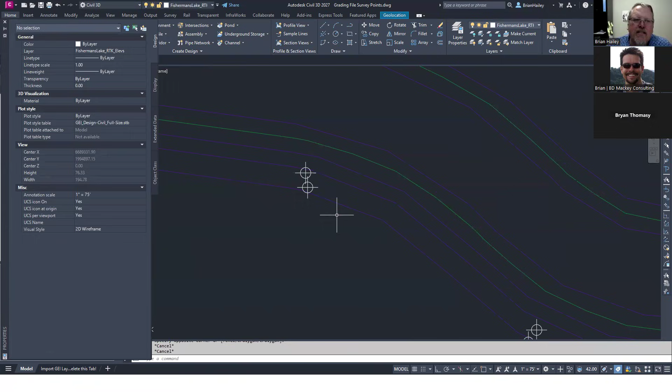Well, that's where the fact that Civil 3D is built on top of Map 3D comes into play. If you weren't aware, Civil 3D has Map 3D built into it, so you have almost all the functionality of Map 3D. I think some of the industry models aren't available in Civil 3D, but pretty much everything in Map 3D is available in Civil 3D. You just have to know where to look for it. So if I come up here to the workspace where it says Civil 3D, I can change this to the Planning and Analysis workspace.

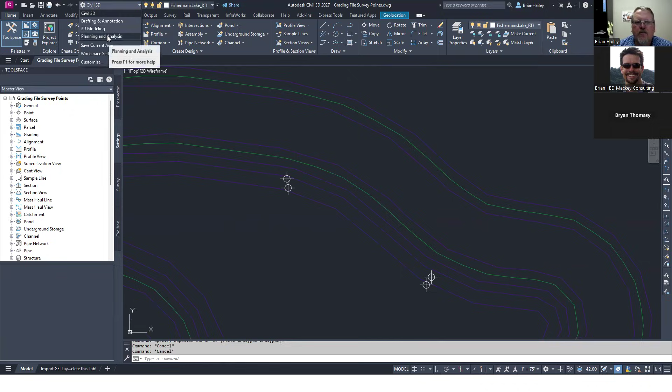All right. And this is where you get access to all of the map tools. Now, map has the ability to place annotation on objects that have this object data. And again, the object data came from a GIS system somewhere, either from importing a shape file or exporting out of another GIS program, something along those lines. And so I'm going to come over here to the Annotate tab.

And what we need to do first is we need to define a template. So the template says, this is how I want it to be labeled. This is how I want the label to look. And this is the data that I want it to label. So I need to define a template. And once the template is defined, I can then insert that template onto the objects inside of the drawing.

So I'm going to go ahead and define the template here. This particular drawing doesn't have any templates. So I'm simply going to create a new template. We'll give it a name. We'll call this one feature ID. Select OK. And it brings up the block editor. And this is where you go through and you create the annotation template. It's just a block that has map annotation text inside of it. You can put other things in there as well, but the key is that map annotation text.

Now, if we were using Map 3D and not Civil 3D, up here on the ribbon, there would be a button to insert map annotation text. But for some reason, the Civil 3D folks thought, Civil 3D users don't need that. We're not going to put it up there. So you have to type it. So the command is MAPANNTEXT. So this allows you to place in that map annotation text. So I'm going to go ahead and do that.

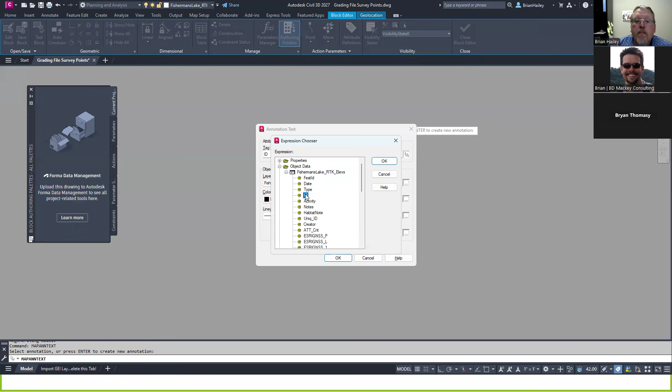So I can pick up on the properties of the object, or I can pick up on the attributes of the block, or things like that. But in this case, I'm interested in this object data, because that's where that feature ID, that ID is. So I'm just going to choose that. Now remember, if you don't see object data, then this really doesn't do you a whole lot of good. I suppose you could label the attributes of a block, but why not just use the attributes of the block? Anyways, I'm going to choose that one, and you can see it places it up here. And then you can put in all this other information.

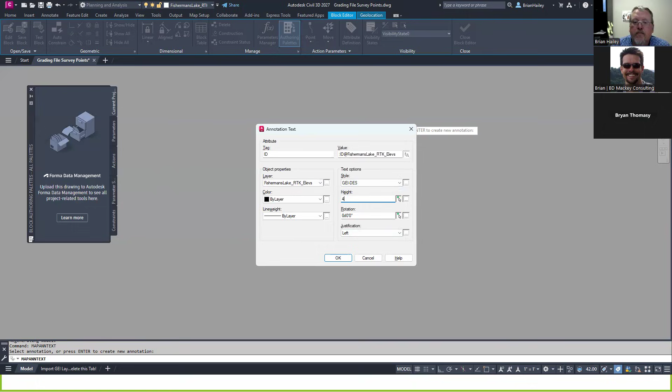Now, as best I can tell, the map annotation stuff does not respond to the drawing scale. So what I'm going to do is just manually set the height here. I want this to be 4 units tall in the drawing. Select OK. And then I'm going to insert this wherever I want it to be within the block editor. So I'm just going to insert it at the insertion point at 0, 0. So I just type 0, 0. For whatever reason, we're zoomed way out. So if I zoom extents, you can see there is the text now.

And if I wanted to, I could add additional text features in here, add them above, below, whatever I want. In this example, I'm just going to do the one, just so you can see how it's done. And if anybody's interested, I can show you how to add the map annotation text button to this ribbon. If anybody's interested, you can put that in the Q&A, say, hey, Brian, how do you add it?

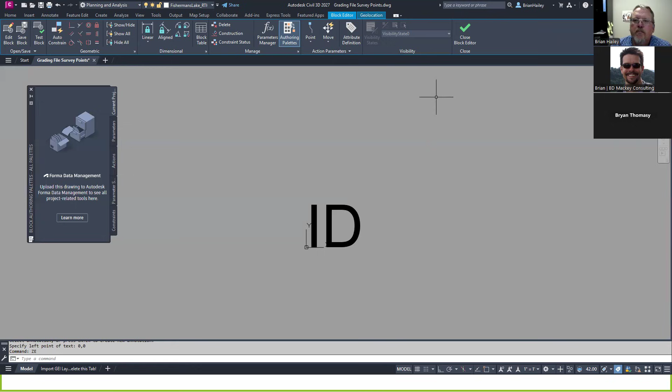You get the idea. All right, so I'm gonna go ahead and close. I'll go ahead and save that. And we're good to go. So I'll go ahead and hit OK here.

So while you're in there, you had a follow-up from Christopher. Can that see property set data too, or just object data? I believe it's just object data. I don't think it can see property set data, because property set data is a Civil 3D thing, and this is a Map 3D tool. But I'm not positive on that.

Right, but that's a great question. Perhaps we can investigate that.

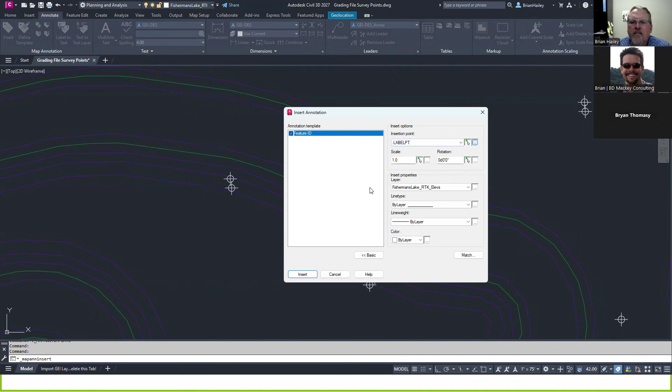So now that I've got the template defined, I can come over here and insert the template. I'll choose insert, choose the template I want to use, and toggle on that feature ID. Then I've got some options here, so I can choose different places that I want to label it. This is important if you're labeling a parcel or something like that, like the centroid. I'm just going to leave it all set to the defaults here. Choose insert, then I can select those objects, hit enter, and it labels them for me.

And there it is. If I need to, I can adjust those around. But I have the text in there based off of the value on that particular AutoCAD point, which is just object data. Now there are some other options up here, and I haven't really played around with these.

I figured I could just go ahead and try it live. Why not? There's an option here to refresh the annotation, so let's see what that is. Let's see if this moves them back to where they were.

So if I choose the feature ID and I choose OK, full annotation, yep, sets them back to where they were.

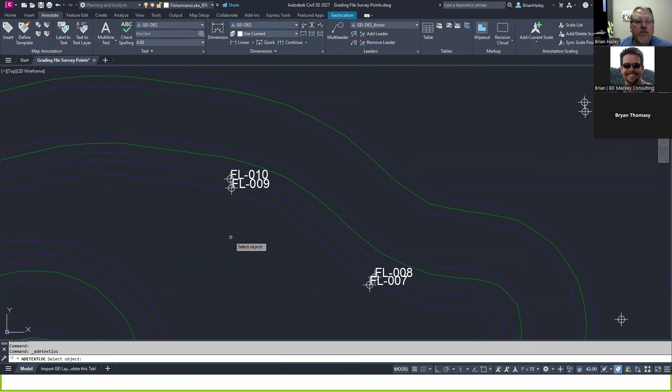There was also one in here where you could reposition it, define the text location. I'm not sure what this one was. Select an object. And I want it to go... not sure what's going on. Pick a new location for the text. There, it doesn't seem to be doing anything.

What if I refresh now? No, doesn't seem to do it. I was hoping it would. What was this one? This one was update annotation. I'm not sure what the refresh versus update is.

And then if you want to, you can delete them all. So if I'm like, oh, I really don't like these, I can just come in here and delete all the labels that were created from that feature ID, and now they're all gone. Now I'm going to undo that real quick. I can also just erase them.

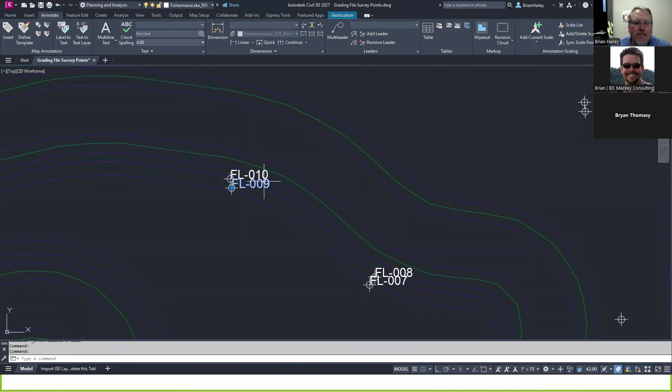And I just found this out earlier. So if I erase them, and then I decide, you know what, I don't like that template, I want to get rid of it, that annotation template, I can come in here to the feature ID and then delete that template. And you'll get a notice that, hey, it can't, because it's being used. What's it being used by? Well, nothing, but it's being used.

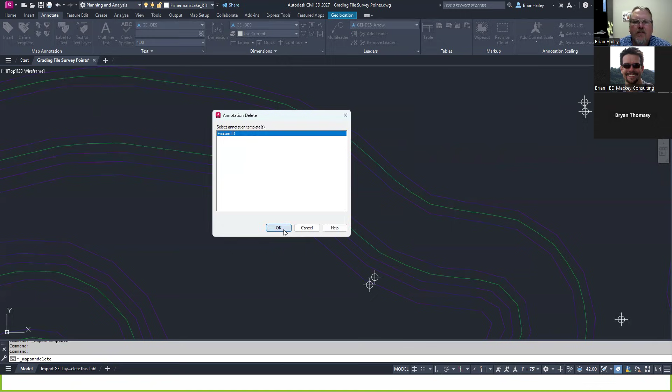So if I come in here and I then delete the annotation, just like I did earlier, now when I go in I can then delete that annotation template if I want to. So like I said, it's just something I kind of noticed - the question came up here in the office and I thought it would be a good thing to share with everybody, because you might find yourself running into that situation.

So now you're showing this in 27. Is it only viable in 27, or is it there? You did have to type in your map anno, whatever that command was. Is it only 27 or is it in previous releases as well? That's a good question, I don't know. I haven't tried it in the previous releases, but I believe you have to type it.

Yeah, I know a lot of the map functions are available in previous releases. Matter of fact, we were just looking for this and we were in 2025 doing the similar thing, but we were actually wanting to use the data to populate our structures with inverts. Because you get a lot of that stuff from the GIS. And that was Max's question.

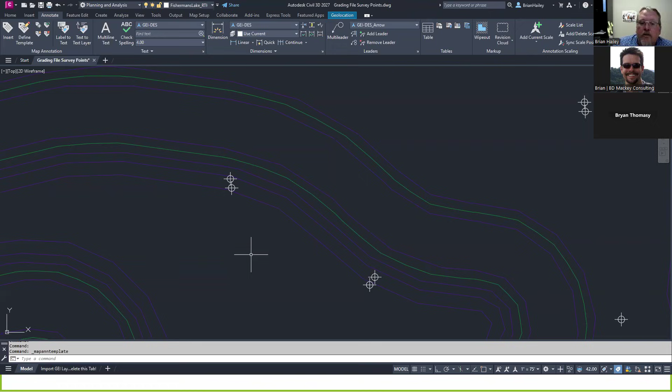So if anyone has 26, 5, or 4 open there, feel free to type in that command and see if it's there for Max. So the commands should be there. So this functionality has been around since like release 14. Right, so I know the command, the tools will work there. It's just whether or not that command is on the ribbon is the question.

And then Adam posted a follow-up to Christopher's property set data question in the chat. Says you can't use the map tools for property set data, but you can use the PSD editor to create some label styles similar to map annotations. It's more difficult since it's not documented. And here's an old tutorial, so for those of you listening live, you can click on that link in the chat.

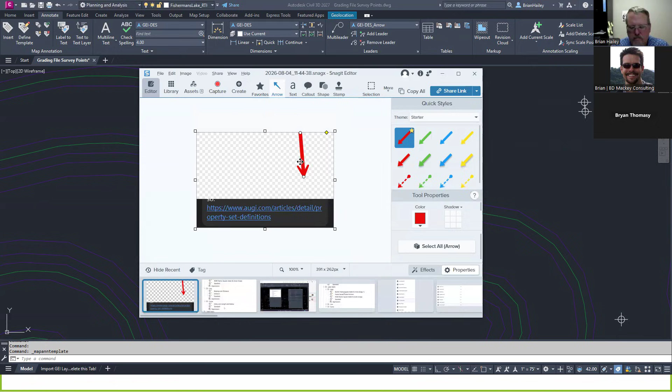So there were some other questions. Max asked, do we work with reference templates? And if so, are there any issues with working with them? They seem to be having an issue with the label styles that we're working around, but I'd like to avoid any other foreseen issues before rolling it out.

I'll be honest, I do not utilize reference templates at all. We actually have a project where we're considering using them for the first time, so there's some caveats to be aware of with them, and I can show that off.

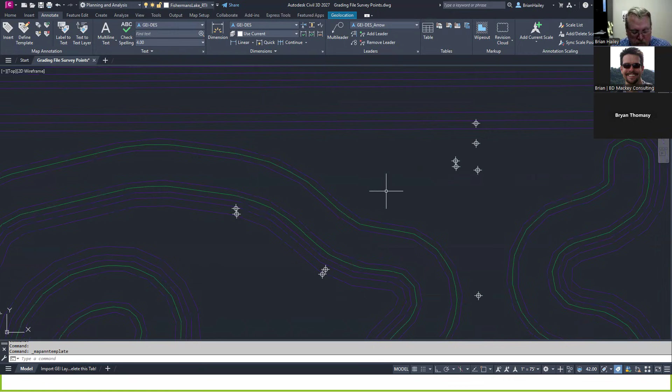Let me go ahead and create a new drawing so we can discuss real quick how these work. I'm going to open up a drawing with no template, so this is like the most basic drawing you can get in AutoCAD for the most part. We'll change this back to the Civil 3D workspace, and we'll go ahead and save this.

Let's just save it here. Reference. Voila. All right, don't show me this again.

Okay, so to bring in a reference template, you would go to the Manage tab up on the ribbon, and then we have under Styles, Reference. So before I do this, I just want everybody to see if I go surface, surface styles, you can see all we have here is standard. So I'm going to go ahead and reference in a template.

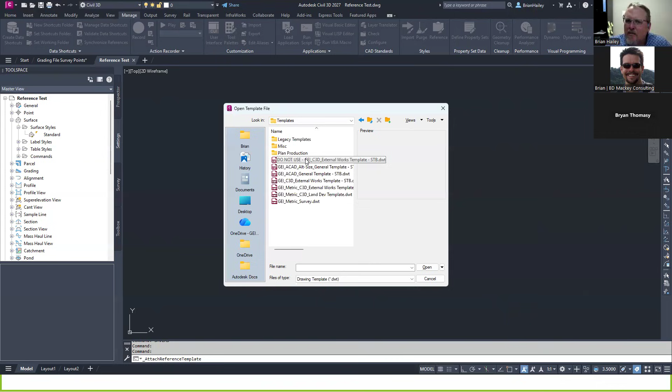Okay, so as you're attaching the reference, you can choose what information you want to reference in. All right, let me go ahead and make this a bit bigger. So for example, maybe from this template, all I'm interested in are the surfaces.

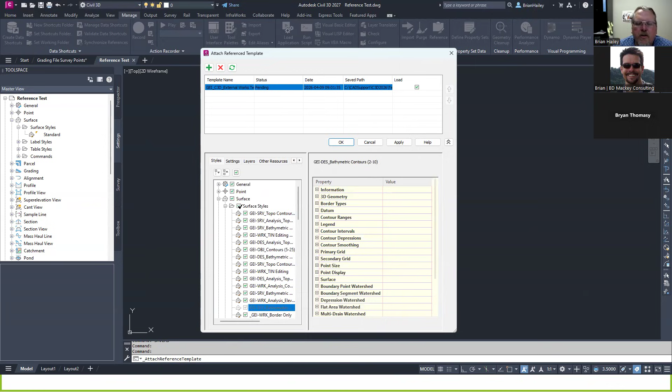So I can uncheck everything. Let me uncheck it. And then apparently... can't uncheck everything. There's probably like the settings are controlling things. Yeah, so for example, this is probably a default style in a setting somewhere, so you probably can't undo it. But you can pick and choose what you want.

You can go to the settings and... is that cough? There it is. You said you've been struggling for a while with this. So this cough will go on for like 5-10 minutes and then it'll disappear. It's bizarre. I apologize, but there's not a whole lot I can do about that.

But anyways, you can choose whether or not you want to bring in the drawing settings, the feature settings. You can bring in the AutoCAD layers as well, so if you change a layer in the template, it will change in this drawing. Other resources: blocks, text styles, line types. What else do we have here? Property sets—we mentioned property sets before.

It's not something I've used a whole lot, property sets, but you can bring those in as well. You can also bring in additional templates, so if you also want to reference in the default Civil 3D template, you can do that as well. I'm not going to do that right here, but I'll just go ahead and select OK.

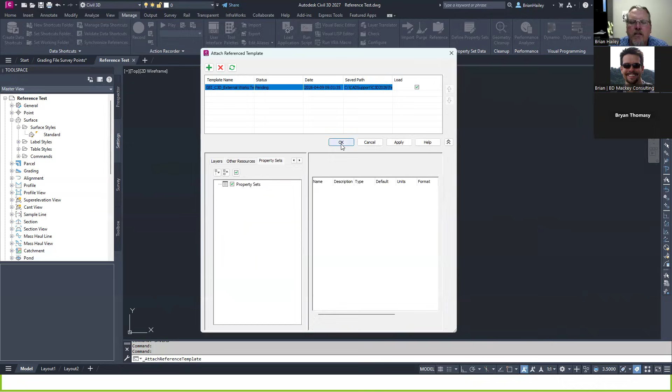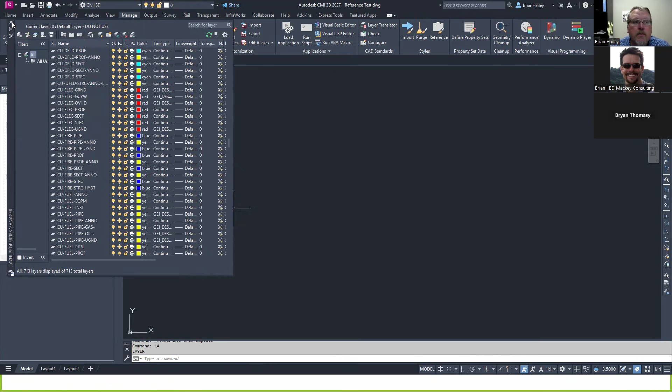And after a moment, you can see we now have all these styles in our drawing. You'll notice a little blue paperclip next to it, which means that particular file is referenced in. If I go into my layers, I have all my layers referenced in too—these aren't just the layers that came from the styles, these are also the layers that came from that template that weren't being used in a style. If I go into my drawing settings, my feature settings, those are all referenced in too.

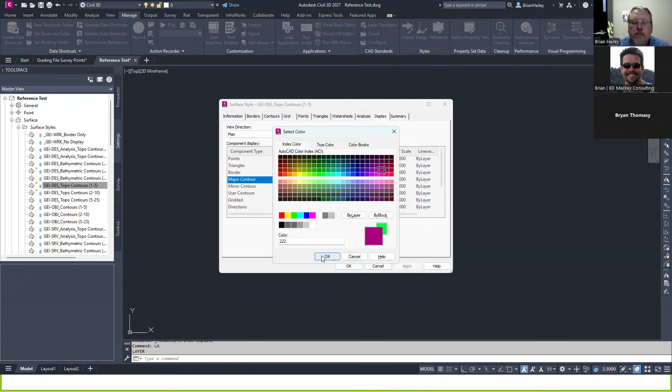If I decide, hey, for this particular drawing I need to change something on, let's do the design contours—I'm just going to edit this. Maybe I want to put the contours on a different layer or force a color on. I'll be a bad drafter and force a color on something here. All right, maybe I want to make these like a dark red or dark purple. You'll be getting an email promptly from HR.

So if I'm trying to edit a reference style, as soon as I hit OK, I get this little dialog box saying, hey, wait a minute. You can't edit this, it's being referenced in. What do you want to do?

So there's three options. One, you can cancel and say, I shouldn't have been doing that, let me cancel out and go back the way it was. The other option is to make a local copy of the style with a different name, and then use that, which is probably what you should do.

The other option is to apply the edits for just this drawing session, so the next time you open the drawing, the style reverts back to the way it was in the template. Notice there's no option to change the style in the template, and no option to just override it always for this drawing. So you can either create a copy or not. Those are really your only options.

I do like this because a lot of times it's like, oh, I just need to see the border of the surface. Go edit the style, turn the border on, and then you don't have to worry about it because it's just going to revert back the way it was before, even though you really should just change the style the surface is using.

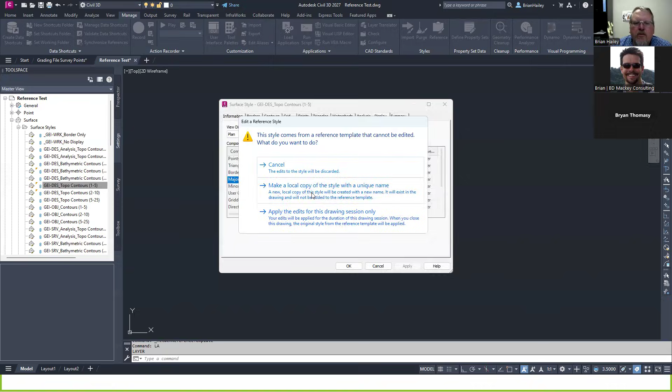So I'll go ahead and make a local copy, and you can see it now has a new style here, and it puts the copy at the end. And it is not referenced in, so you're good to go.

Now, if I decide I don't want to reference this anymore, you can just choose that, remove the reference.

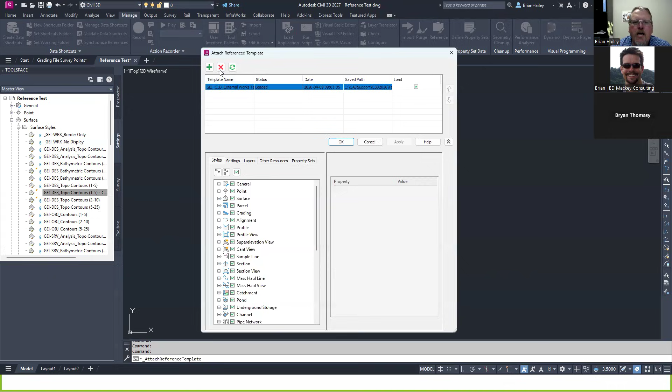And all those styles should eventually go away. Did it not work? Oh, I didn't hit OK. Hit the X. There you go. They all go away. But my copy remains, and any styles that were being used remain.

So that's kind of how a reference template works.

Now I'm really curious if folks have experience with reference templates, and have any thoughts on them. Good, bad, indifferent. Oh, I don't really care about indifference. Christopher and Robert both had comments in the chat on that.

Christopher says he uses reference templates for the sole purpose of managing property set definitions and associated value styles, value lists, and table styles. Oh, okay, excellent.

And then Robert said, be careful, circular reference templates are possible when using a template to start a drawing. Circular reference templates, like if you use the same template that you're referencing in to create the drawing.

I mean, that would be kind of ideal though, right? But the whole objective is to not bring in the kitchen sink. And that's the nicety behind the reference template.

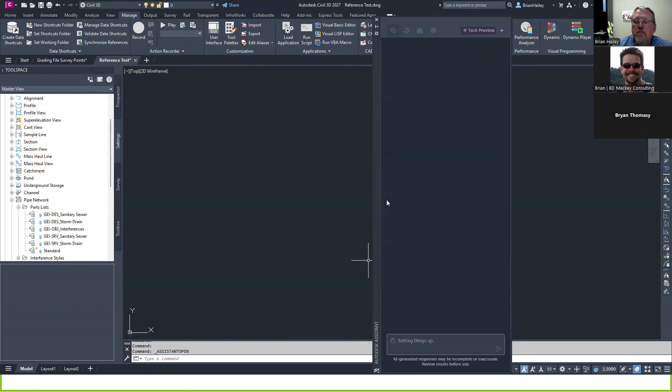Yeah, I haven't played around with it in a while. The tech preview one, I don't even know - I think it is. And I will also say there was a Civil 3D update today, which probably improved on that slightly. I know the latest point releases of all the Revit products improved, or in the 2027 Revit product improved on the Autodesk Assistant.

Very nice, good, we should go - I should go download the update. You mean you didn't download it when it came out 4 hours ago? How dare you, Brian?

So my understanding, and I haven't tested this a whole lot, is that the Autodesk Assistant can't change objects in the drawing, right? So if you have a line in the drawing and you come in here and say 'Hey, move all lines 3 feet that direction,' it wouldn't be able to do that.

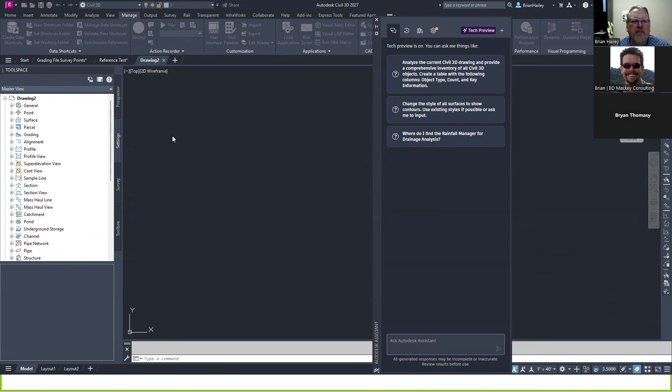One thing that I did use it for was trying to find styles. Let's see - let me just create a new drawing here. Let me create from our company template just because I'm more familiar with that. Actually, no, this will be fine. So what I'm gonna do is come in here to a point label style and change the precision of this label way out.

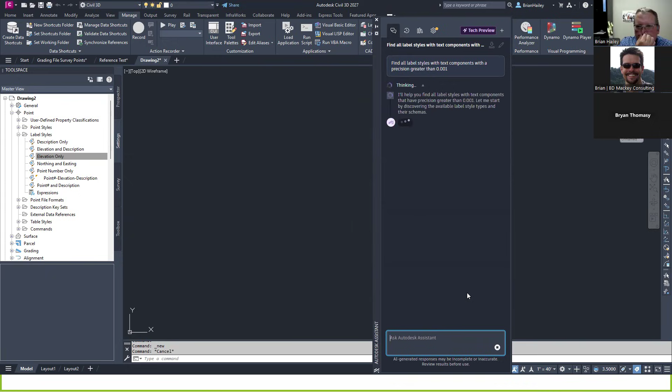And then I can ask the Autodesk Assistant: find all label styles with text components with a precision greater than 0.001. I've tried something like this before and it did work, but let's see if it does it this time. I love that it's telling me what it's doing - I'm like, I don't care, just do it.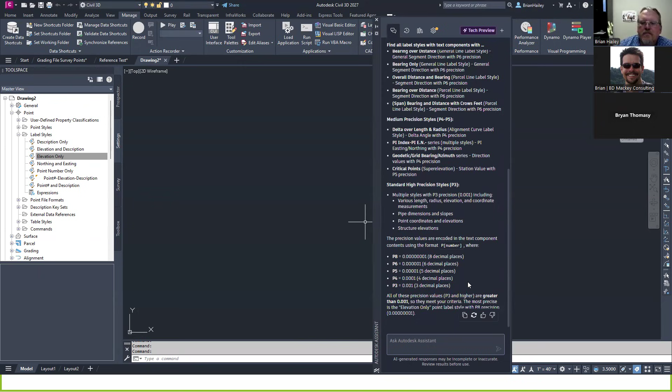Oh, it's terribly funny. Yep, here we go - high precision styles, elevation only, which is the one I changed, set to this really big number. There we go. Looks like there's some bearings and distance with a precision of 6. That's nice - it gives high precision, medium to high precision, medium precision, standard precision. Yeah, so it was able to do it, which I think is pretty damn cool.

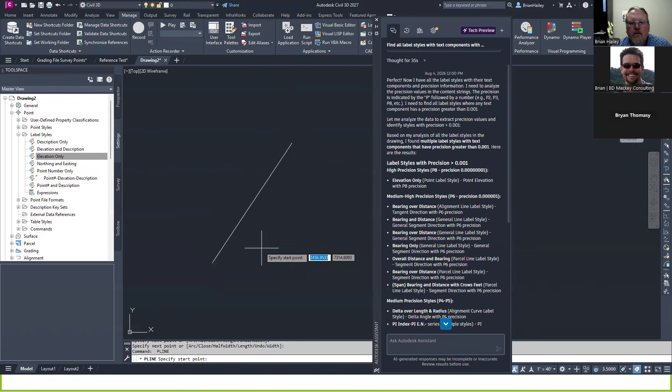So I think things like this would be really helpful - being able to query the drawing, find information out of the drawing, those types of things. Let's see, this length is 87... all polylines are longer than 90 units. See if it does with that.

There you go. Yeah, so it's selected and zoomed to it. Can we make all polylines exactly 100 units long? And I think this is probably where it's going to fail. Which is probably a good thing. I totally agree. Yeah. There it is.

I mean, I've been playing with this. It cannot automatically modify the polyline lengths to be exactly 100 units because length is read-only. It's calculated. Vertices are not writable, so it's not able to edit the geometry in the file. But we can find out information on it. Change polylines that are shorter than 90 units to red. See if it'll do that.

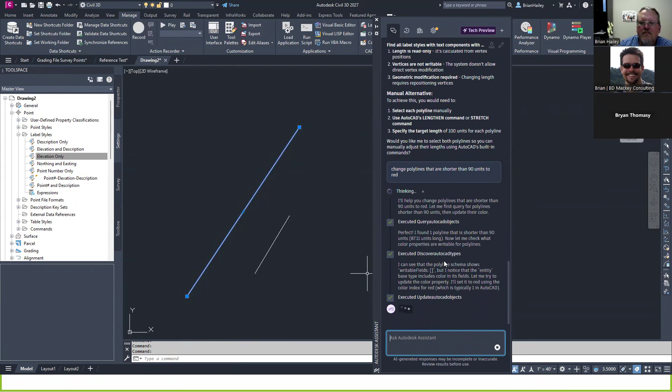And then you'll immediately be getting a call from HR again. Yeah. This is what I saw in the demo, and it turned it red, and I was like, oh. I can't remember if it was an override or the change. No, it wouldn't have changed the layer. It would have done the override on it. I heard similar things in some AutoCAD demo as well. So you could just say, hey, change everything back to ByLayer. And in case somebody overrode it, I'm like, you could do Control A and do that in the properties. Or you can use the SETBYLAYER command.

Yeah. I think there's a lot of times where people are trying to come up with reasons to use the AI that it's like, you do realize that there's a 3-click answer to this, right? Natively. Yeah, you could easily go. And that's one of my fears about it as well, is people will use it as a crutch and not learn how the program works.

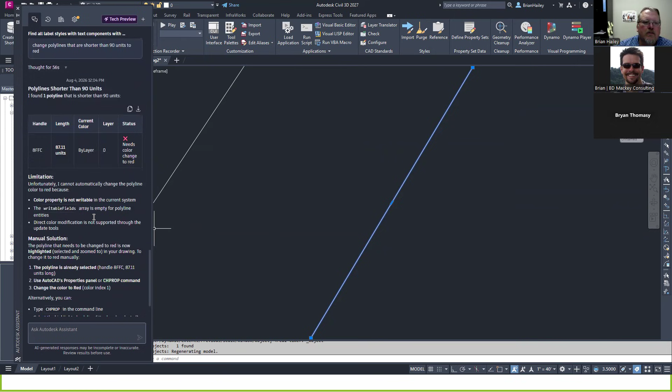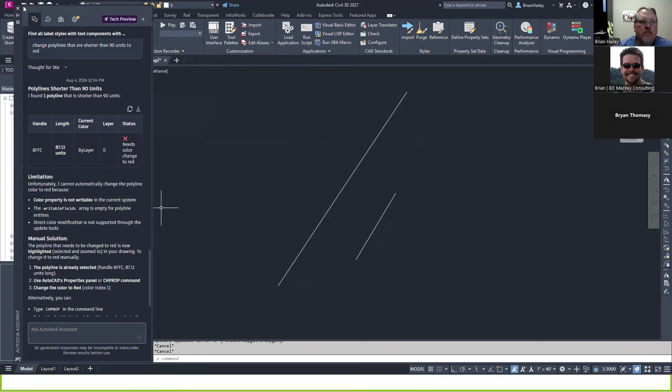Is it not going to allow it to do it? No, it's not letting you do it. Color property is not writable. Very nice. Gives me a little ray of hope. It did select it, did zoom it to me. So we could say select all polylines that are shorter than 90 feet, and then I could go change the properties of them. Yep, absolutely. Which is great. I think that's awesome. So hopefully that gives some folks something to think about at least.

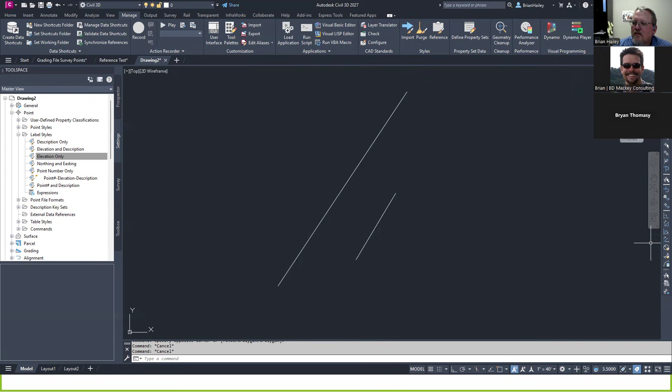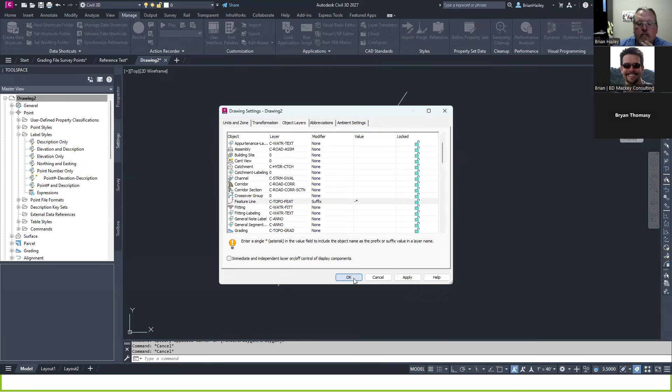So Robert had a question, and I looked into this, and I can't find a way to do it, but they're asking, is there a way to get the layer a feature line is created on to use a feature line name instead of the survey site? It says alignments can do this, but FL seems to be missing this option. That's a good question. So if we could do it, it would be under the drawing settings. It'd be the layer, right? Yeah. So layer, feature line, we'll do a suffix of dash asterisk. And as long as your feature line style is set to 0, that should work though, right?

Create feature line. And we'll give it a name. Call it Bob. It's on the layer Site 1. So it doesn't use the feature line name. It uses the site name. Which is what Robert put in the question. And I went into the creation tab under the settings, grading, create feature line, and I didn't see any options there either. Yeah, the layers aren't under the feature settings. So unfortunately, I don't think there's a way to do that out of the box, Robert.

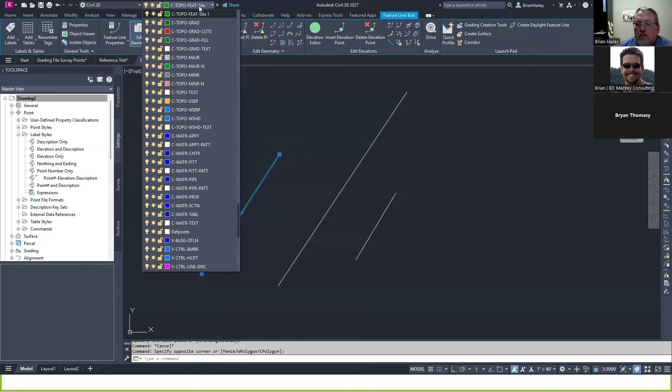It's a good wish list. Yeah. Just like when you right click on a feature line and you say add feature line to surface. Can we have one that says remove feature line from surface? That would be really nice. Yep. As soon as I find out where that's coming from and we get it in play, I'll bring it to y'all. I appreciate that. Oh yeah, it's little quality of life things. All right.

Let's see. We got another question here. This is interesting. Do you happen to know a way to project a surface profile from a different alignment without creating both profile views in the same drawing and selecting the profile, then the profile view, and receive the project? Ideally, it'd be great to be able to create data shortcuts of each alignment and profile and just project them into the desired profile view. FYI, Beverly typed later that she left. So if you wanted to skip this question and come back to it, or answer it for everybody else. I don't know of a way to do it.

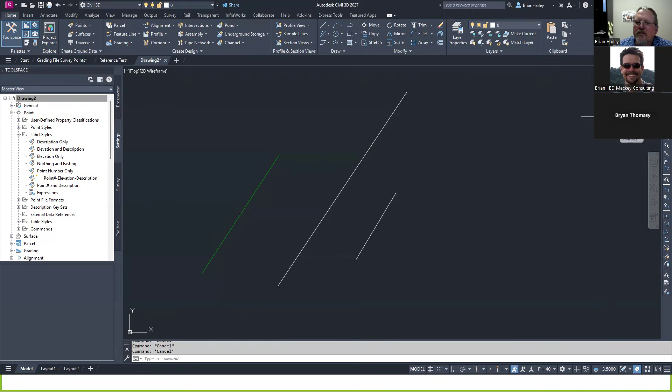Okay, so the question is about surface profile specifically - projecting a surface profile from a different alignment without creating both profile views in the same drawing.

If the alignments are parallel to each other, you could just sample the surface at an offset. Let me open up a drawing here real quick.

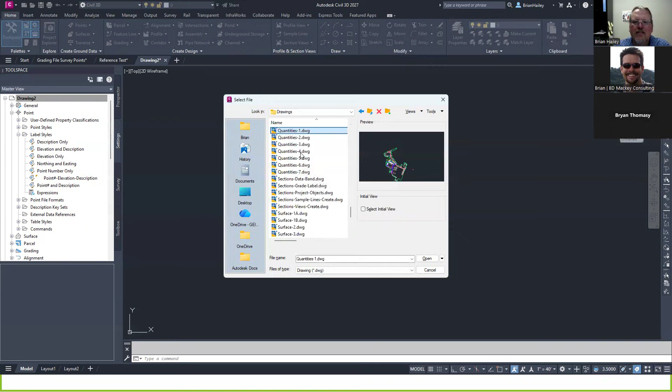As that's opening, Nathan had posted in the comments earlier - if you remove a feature line from a surface, delete the feature line, then type oops. I was typing a response because we had this happen when using feature lines as targetings for our corridors too. If you delete it, all the targeting goes away, and you're left weeding through the corridor web to find out where that targeting went again.

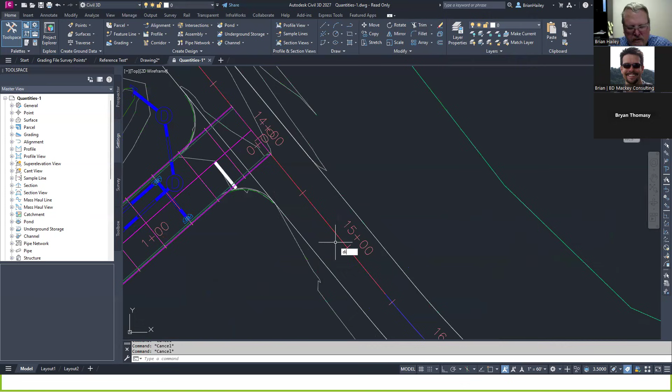So as I was saying, if the alignments are parallel to each other - let's assume this polyline was an alignment, and I wanted the surface profile along this alignment shown on this profile. Let's see the distance here - it's 20 feet. So I want to sample the surface 20 feet to the left of this alignment.

So when I go to profile, not profile view, but create surface profile - as I'm sampling it, I'll do the proposed ground and toggle on the option to sample offsets, saying I want to go left 20 feet. Negative is left, positive is right. Left and right is determined by standing at station one, looking at station two - then you have left and right.

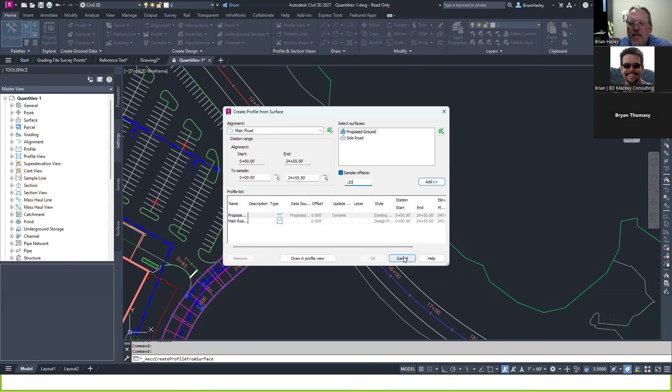So that's how you could do it if they were parallel with each other - no need to even create that other profile. If they're not parallel to each other...

I'm not sure how to do that. I don't know if there's a way to do that - I can't think of any there is.

But I do want to give a shout out to Nathan for knowing about the oops command - a lot of people don't know it. I was just talking with somebody about the oops command today at work, helping someone with something. He had mentioned the burst command, and I said yeah, that's an express tool - do you know about the oops command? He's like, what?

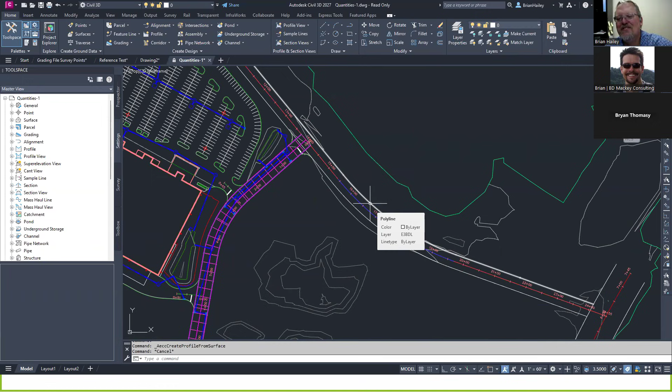Yeah, there's a lot of really good express tools. So unfortunately Beverly, if you watch this later, I don't think there's a way to do that, but maybe you just have parallel alignments and can do the sample offset.

All right, what else we got Brian? We got one, let me see. If the questions slow down I'd love to know your thoughts on a website, but we'll have to dive into that one later. There's a question after that about subassemblies and the subassembly composer - how do we handle distribution?

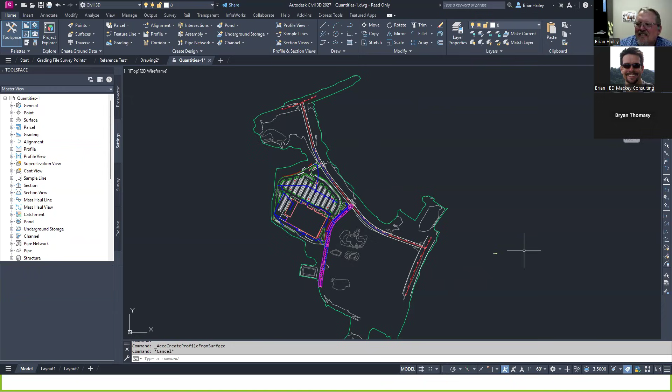Well, I've got my own smart remark about distribution, but I don't really - how do I handle it, I'll be honest.

Yeah, you could do a tool palette. The PKT file would need to be somewhere everybody has access to it - put it on a tool palette, export it out, and have them import the tool palette onto their systems. That should work. That's how we handle it, but we don't use it as much as maybe other corporations would, so I can't speak too intelligently about that.

In my experience with custom subassemblies from Subassembly Composer here at GEI, it's very specific to a piece of a project - like Joe is doing an embankment that has these weird requirements, so we go create that subassembly for Joe. He uses it on that embankment and it's never used again. That's my experience with Subassembly Composer, at least here at GEI.

Now, if I was still working at an engineering firm that did just a ton of work for, say, for example, the city of whatever, and the city of whatever had this unique subassembly or this neat, unique road cross section that we modeled using Subassembly Composer, then I would want all of the engineers in the company to use it, because they would be able to benefit from it, because it's a very standard custom subassembly for the region that they're in. In that case, I think a custom subassembly or a custom tool palette would really come into play for that.

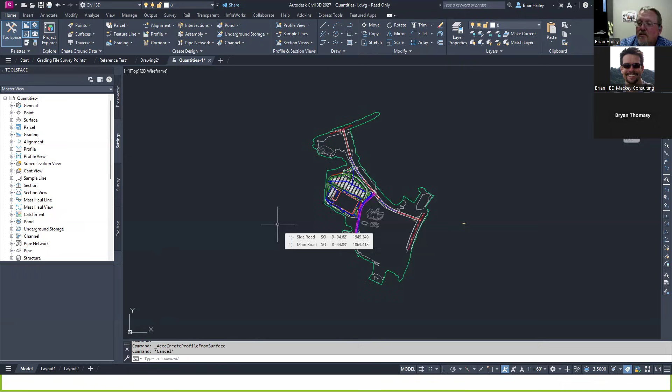I guess we're out of questions. Yeah, so if anybody else has any questions, great time to ask them. Sean popped up just in time. Oh, awesome. On this drawing, can you show how you would go about grading the site for a parking lot and the road? Do you set feature lines for every parking stall? For every parking stall? Oh God, no. Probably just the ADA ones to make sure that they've all got the maximum 2%.

But no, so if I were to model this, the way I like to do parking lots, and this is kind of a general grading type of a thing, a lot of times what I will do is I will create an underlying surface, like the general slope of the surface, right? Yep. So in essence, I want the surface to, you know, go this way, that direction. There, that way. Oh, I messed it up. Oh, so close. Anyways. Man, what amazing feature did you just use to draw that arrow?

Oh, feature line extensions. Brian, have you tried those out? For the new feature line additions? No. Draw a feature line and select one of the grips. You now get more options to extend. Sorry, I'm not detracting, Sean, but look at that. You hit the extend button, and it'll add a new PI after this one. That is so helpful. And then you can turn that into a curve. You can extend things beyond. It's got a lot of new functionality. This was in 2026, by the way. There you go. And it's perfectly tangent too, because I eyeballed it.

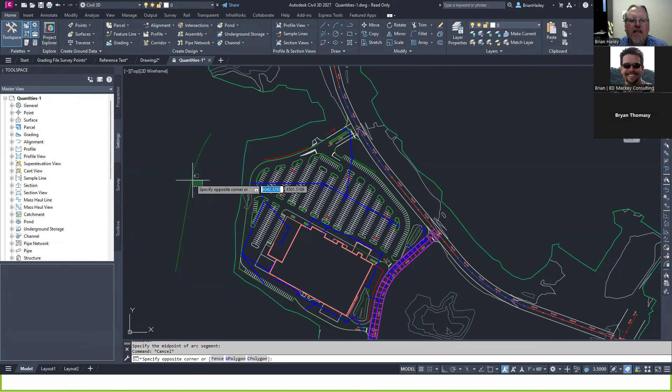Uh-huh. Oh yeah, you did great. Put you down for your architectural license. Sorry. That's okay, silly. No worries. That was the best comment, Thomasy. Sorry, Brian. Oh no, that was kind of my point. I complain more than anybody about non-tangent curves in architectural models.

Gosh. Right. So I would create an underlying surface of the general elevation and the direction I want the water to flow. And then I would create feature lines for like the curb and gutter. Now, this would most likely be like the edge of asphalt, because that's what the surface represents. It represents the edge. Maybe it's your flow line. I don't know. It's something, right? And then you can create feature lines for those.

Now, if I was doing edge of asphalt, how do I create the feature line for the flow line and the face of curb and the back of curb? I use corridors, right? So you would create a feature line that represents something on the curb and gutter, or let's say, for example, this island. You can now use a feature line as a baseline for a corridor. And so I would create a corridor that runs along here.

Or you could do a stepped offset too. Yeah, you absolutely could do that.

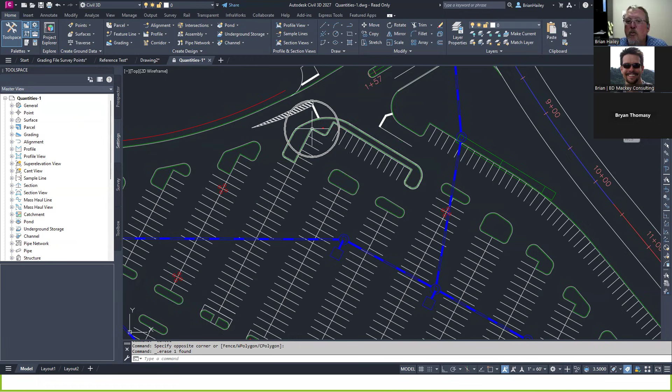But the reason I like doing it with a corridor is because a lot of times the elevations in here don't work, right? You end up with a low point right there at the corner, and I don't want that. I want the water to continue to flow around.

So once I get this as a corridor, I just edit that feature line, and all of the rest of the curb and gutter edit along with it. And then I create a surface from the corridor with all these baselines in it.

And then if I need to, I add additional break lines in the middle. So, like for example, in this drawing, there's an inlet right here in the middle of the parking lot. So maybe I would draw some feature lines or place a spot elevation, or edit some data to the surface to make this a low point, and then maybe put a break line through here and make this more of a high point, et cetera.

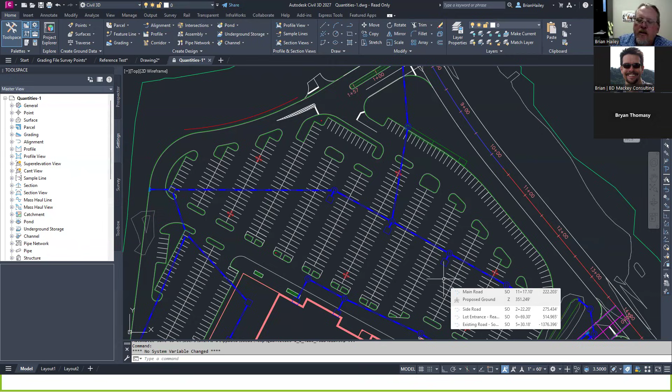So that's kind of the way I approach it. It's a good first run. And then once you get those elevations, you can go in and pinpoint that detailed design and say, okay, this one was originally set to this elevation, that doesn't work, so let me change it to be the elevation that I need.

Now, Adam kind of piped in and he said, do not add points to the surface. Now, while I agree with that, I got curious as to why, because at least you're adding an entity to it. You're not falsely going to your points, going to your surface editor, and adding an arbitrary point somewhere that you can't find after. I think that's what Adam is referring to.

Oh, okay, good, because I totally agree with that. We teach that all the time: do not make surface edits. Add real objects, add feature lines, break lines.

Heck, what I would do, Brian, what you were talking about, is I would actually draw a feature line around the top of my catch basin and add that to my surface. Put something in there and add it to your surface, because otherwise you're not going to be able to find it.

Well, I mean, sort of. Oh, I hate surface edits. So what I like to tell people about surface edits is, for those of you that may not be aware, we're referring to the edits from move point and up. These, what, 1, 2, 3, 4 - these 7 edits here. You will never, ever see me using these. I despise them with a passion.

And the reason is because you have no record of what you're doing. It just shows up in the surface edit, it says added a point at this coordinate, and that's it. I get no feedback from that. Even if you do a zoom to, and you've deleted a point, you don't know what you're looking at. So it's annoying - you shoot yourself in your foot.

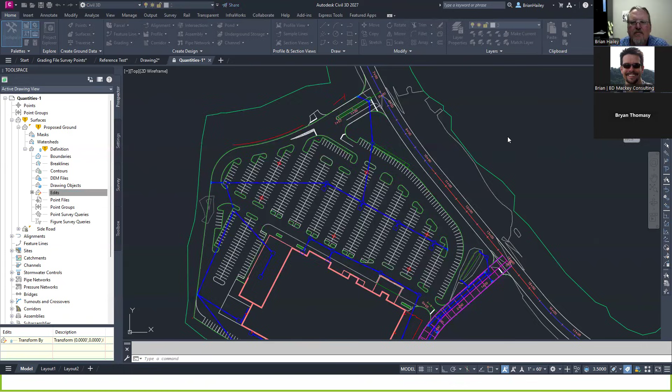Oh, quick elevation editor. I love that one, that's my favorite. I don't know about the grading optimizer, but I love the quick elevation editor. I use that one more than any other tool.

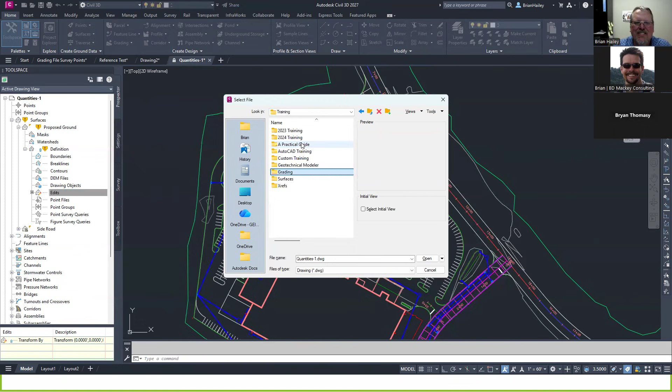Let's see, where did I put that drawing? Some people love to use the elevation editor in tabular form, which is fantastic, but you definitely have to have a fourth screen by that time, because you've got so much stuff all over the place. I think I made a bad joke when Civil 3D first came out in 2008 - I said it had more wizards than a Harry Potter movie, and I'm still standing by that.

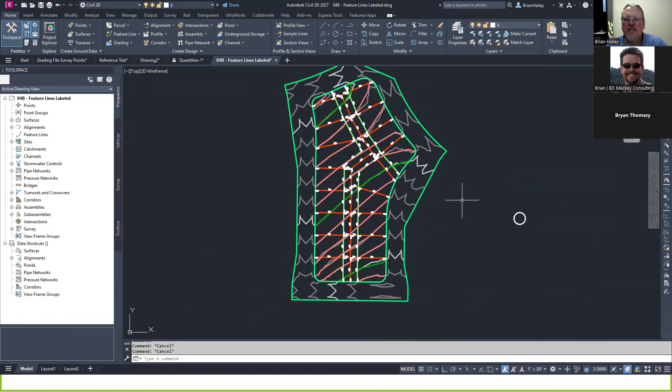It's terrible. Let's see, I'm just gonna leave the line weights on. Okay, so I've got this drawing here. I've got a surface in here, and I've got feature lines that were added to the surface as break lines. Let me turn the line weights off. And so this particular feature line right now - this label is a feature line label. You could also label the surface. Either one's fine, when I've done this in the past.

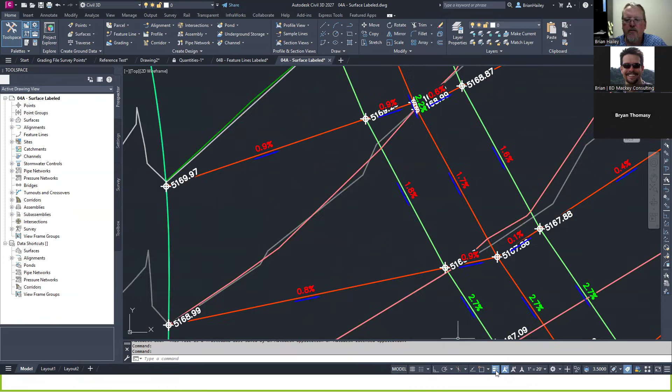All right, so I've got two options here for this. I've got one that labels the feature lines and one that labels the surface, same concept. So this is just a slope label that goes from here to here, whereas this is a feature line label. There's advantages and disadvantages. The feature line labels are really, really quick to add in. But if I were to add, say for example, an elevation point...

Oops, let's try that again. You can see what happened is the label that was up here shifted over here. So it doesn't add additional labels in, it just removes those labels. Oh, that's a bug. Especially if you hit it with multiple, right? I know. Okay, yeah, yeah. I know who I'm going to be talking to later.

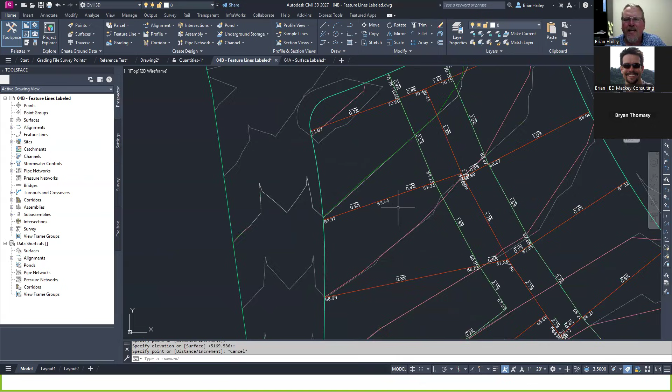Yeah, I was teaching this grading class at AU, and Dan Philbrook came up to me - this was back in, gosh, 2008 - and he said, well, why didn't you just use the feature line labels? And I said, that's why. 2008 is when I told him that. So it's been only 15 years. Still haven't fixed it in 15 years. Going on 20, actually - 2008, 18.

Right, but anyways, a quick elevation edit - like Brian said, I absolutely love it. So this particular grade on this feature line needs to be 2% sloping down towards the road over here. All right, so I'm going to select the feature line and use the quick elevation editor. I just love it.

So as you mouse over the vertices of the feature line, you can see it showing me the elevation of the vertex. If I want to, I could click and type in a new elevation. So I want this one to be 5170, so I click, type 5170, hit enter, and everything changes, right? The surface labels change - the surface rebuilds while I'm in the command with the quick elevation edit. Most of the feature line edit commands, you have to exit the command before the surface will rebuild, but not the quick elevation edit.

But really, I want this one to be 2% going up. So I'm going to, if you notice, when I'm near the midpoint, it's showing me the grade and which direction it's going. If I click when the arrow is pointed this way, I'm editing this elevation, which is not what I want. I need to keep the elevation of the street the same; I wanted to edit the elevation back towards the back of the lot. So I make sure the arrow is pointing at the vertex I want to change, left click, and type in my grade, 2.

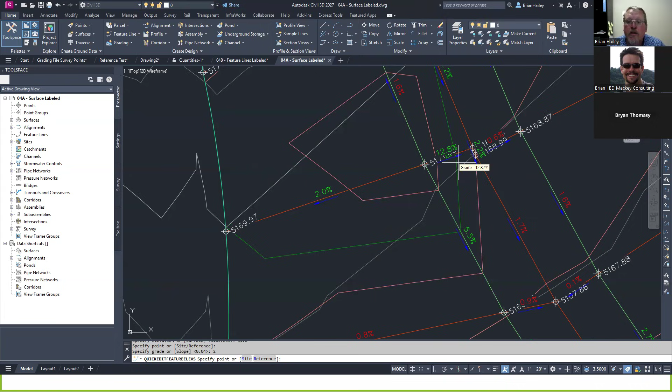I want to continue that up to the next one. Get the arrow pointing in the right direction, click, 2, enter, and there we go. Just to be clear for everybody, this surface is on rebuild automatic. It is.

And so you can see how quickly we can make these changes. It's just one of my favorite tools ever. I love the quick elevation edit, and the reference elevation from reference point. Except if you've got an XREF, why does it always grab the 0 elevation? I don't know. Anybody else frustrated on that one?

All right, so I think that pretty much does it. Well, the left click will actually allow you to enter the command to put in the slope. You'll click and then type in the slope direction you want. It depends upon where that little green triangle is. If the green triangle is in the middle of the line, when I left click, I'm editing the slope. When the green triangle is at a vertex, forming more of an equilateral triangle, left click will change the elevation.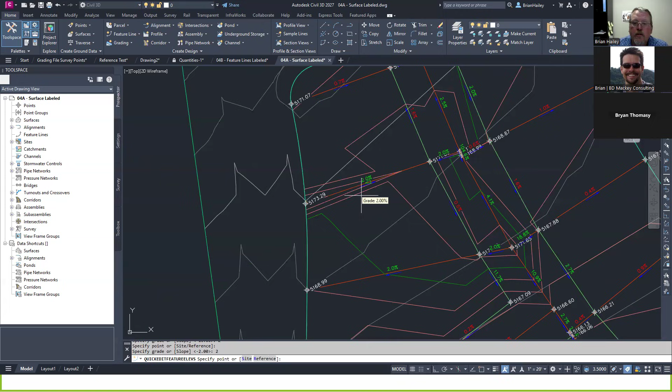And when you're doing the slope, remember the direction the arrow is pointing is pointing at the vertex that will change, so it's holding the one on the other side. So if I point the arrow this direction, left click, and type in 2, it's now going up at 2% from back here.

And this is a great thing because, oh no, I didn't want to do that. Don't escape out of the command and undo, because that will undo all the way back to the beginning of the quick elevation edit command, not just the last thing you did. Don't undo, instead just make it right.

So if I mouse over that vertex, I left click and it's asking me what the elevation needs to be. I don't know the elevation, it just needs to match the elevation of the road surface. Down here at my command line, I can choose surface, select the surface I want, and it puts that elevation at the command line for me. Then I just hit enter to accept that elevation.

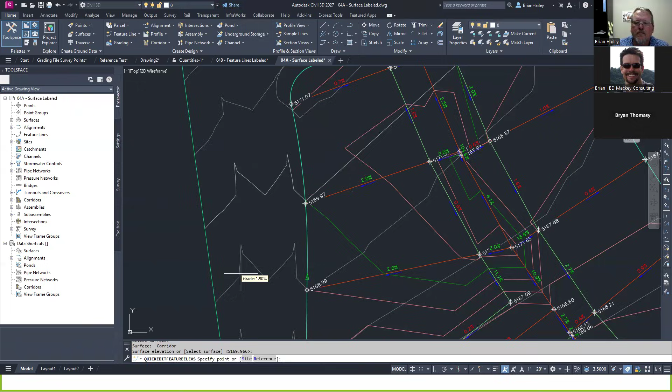I love the grading tools in Civil 3D. Oh yeah, they're so awesome. I can't tell you how many times we've actually run a corridor around the outside, and so that's its own surface. That way, if we need to update, we can update it and then just easily go through with the elevation editor, select surface, and pop it all back to it. It's really nice, which is essentially what was done here. Yep, it's my number one tool.

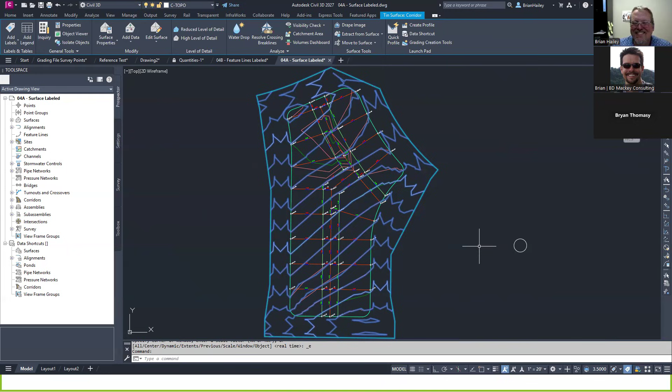This is my brother Daryl, my other brother Daryl. It's like in my family, I am we, and my wife is somebody. You know, like we need to mow the grass, we need to fix the light fixture, somebody had to go shopping. Yes, somebody.